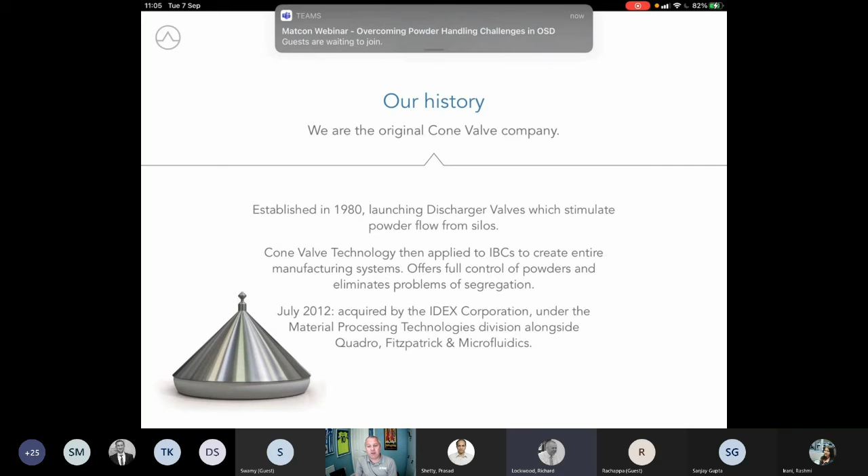Matcon is just over 40 years, so 41 years ago Matcon was founded, making large valves to discharge powders from silos, moved on into IBCs to create systems, and the cone valve, which we'll look at later in terms of what it can offer, allows the full control of powders and eliminates segregation within the powder handling side of things. And in 2012, we were acquired by IDEX Corporation, where we joined Quadro and Fitzpatrick and Microfluidics under the Material Processing Technologies umbrella.

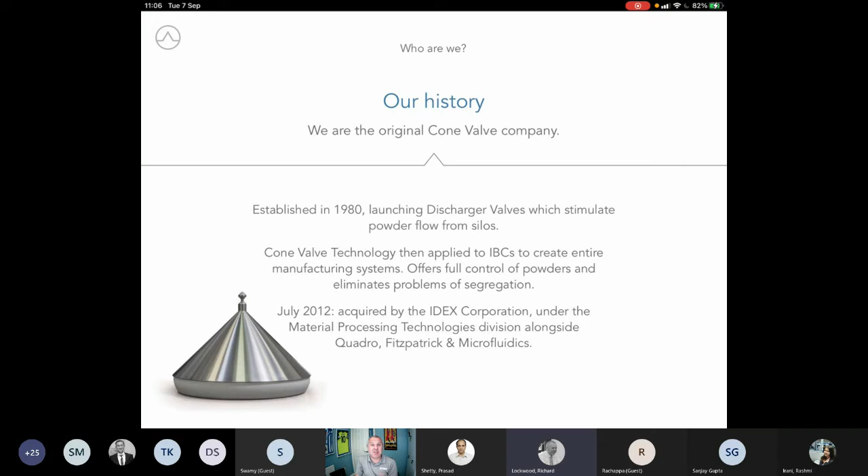So we'll go back now and we'll just have a look at a little bit to begin with at the challenges that the industry faces within the market. We'll come back to this page a little bit later, but we'll focus initially on the challenges. Now, clearly, it's a competitive marketplace that we find ourselves in and that you as pharmaceutical producers find yourself in. We've got to get the highest productivity at the lowest cost, ultimately out of the factory, get the best return on invested capital and get the best productivity we can.

Obviously, we've got issues around powder flow. There's no denying that. Segregation, ensuring the powder is flowing, it's not bridging in hoppers. And those last points, they really impact on the business's ability to be efficient and be productive and make the best money. If we think about things like the issues around segregation and powder flow, wherever you've got an operator having to make a manual intervention with that process, you've got the risk to the operator, you've got the creation of dust, you've got quality by inspection.

You've got to look at these things to make sure that you're maintaining the product, that you've got all of the powder out of the bin, you've got all of the material into the compression machine. Any powder that is left behind inside the process, inside the bin, inside of anything, is something that you can't then put into a compression machine and make tablets with.

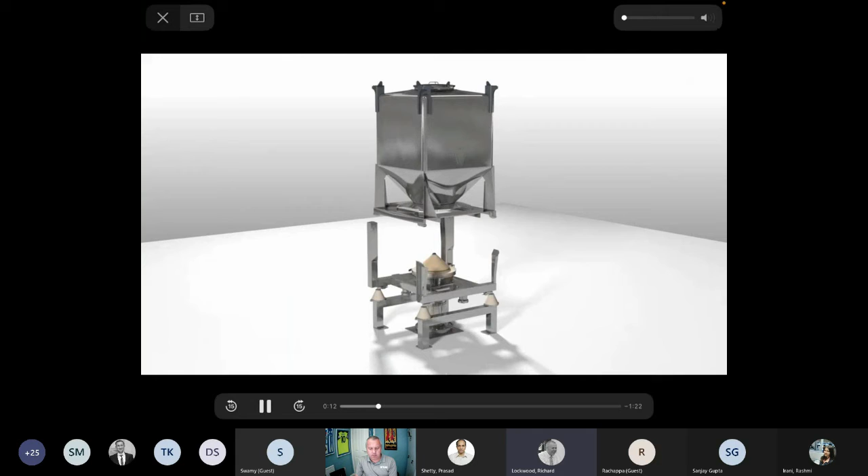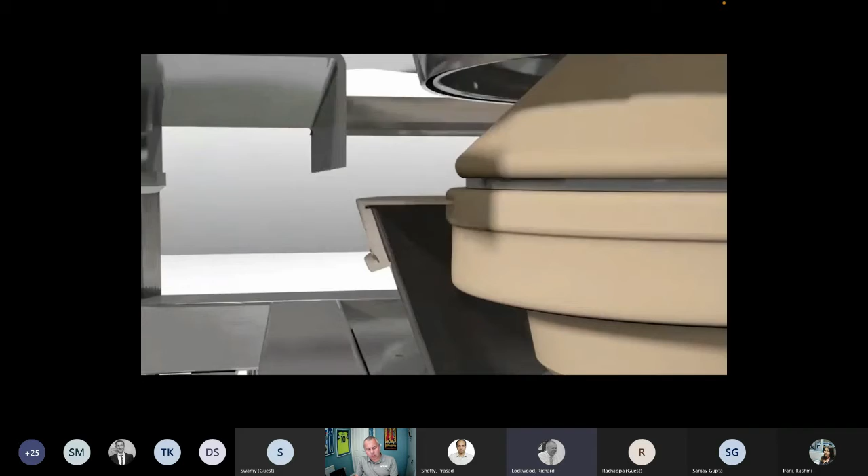I will pause the video as we go through that so I can point out some important details that we have there. So as we said, we have the two pieces there. The IBC is mounted above the discharge station, and we're looking to lower that down now onto that. The cone valve is in the outlet of the IBC and it's loose. And we spoke before about the ability to keep powder inside the process.

What you would have just seen there is the IBC is loaded onto the discharge station. That lip seal was deflected out of the way by the outlet of the IBC. That means that we're creating a dust-tight, powder-tight seal between the powder on the inside of the process, on the inside of the discharge station, and the process environment on the outside.

Again, making sure that we're not contaminating the product from the outside world, but also that any powder, any dust that we're generating is kept inside the process and finds its way actually into the compression machine or into the capsule filler. Because as we said before, if it's on the floor, you can't sell it. If it's on a wall or in the air, you can't sell it.

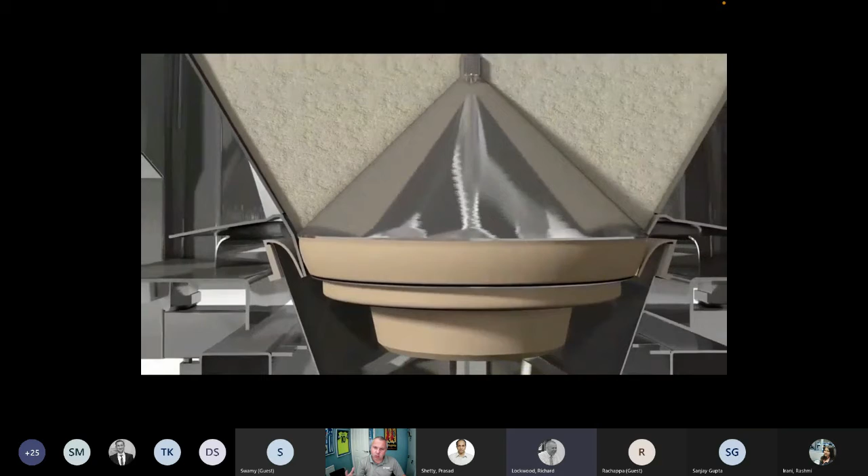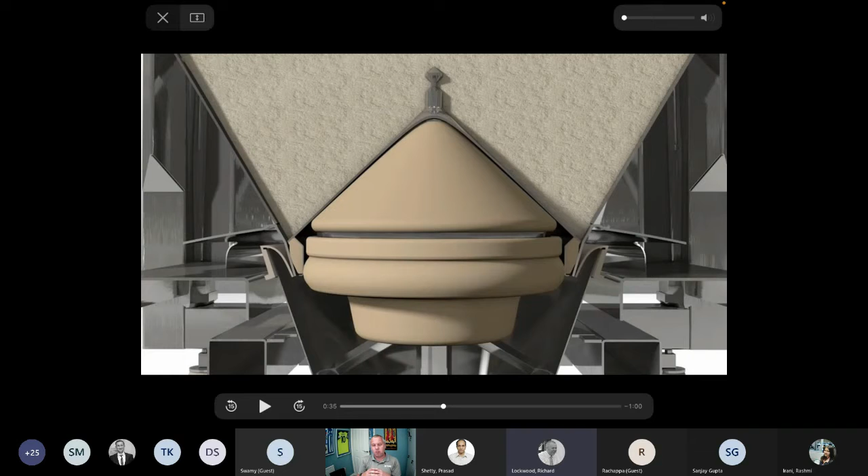So as we move forward, we'll see now a cutaway of the cone valve. The discharge station rises and you'll see an inflation there. What has happened now is that the discharge station probe and the cone valve have become one piece, so that when we actuate the discharge station, we'll lift the cone valve and allow powder to flow. So what we have now, valve is open and we've created an annular gap around which powder will flow out.

So we spoke before about prevention of segregation and protecting the blend that we've got. Ultimately, what we want to do in this scenario is take a blend of granules and make sure they get to the compression machine, that they get to the capsule filling machine in the same state that they left the blender, whether that be a fixed mixer or an IBC blender, which we'll look at later on.

The reason that we help to prevent the segregation is that the powder flows around the outside, around that annulus. There's no core flow. We know with butterfly valves and with other valve systems, we create a core flow. If powder was to flow down the middle of the IBC, we create rolling segregation, and that rolling segregation leads to the larger and the smaller particles becoming separate from one another.

So we're controlling the powder, preventing that core flow, but also we have the ability with a positive shutoff, the powder behind the valve, if we need to close the IBC, the valve closes with the powder. So what we can do in close coupled systems is have a refill to the compression machine hopper. And should you have any challenges with maybe a bit of downtime on the system, because the valve closes with the powder, you can simply remove the bin, carry out any maintenance activities, and then bring that back to the process.

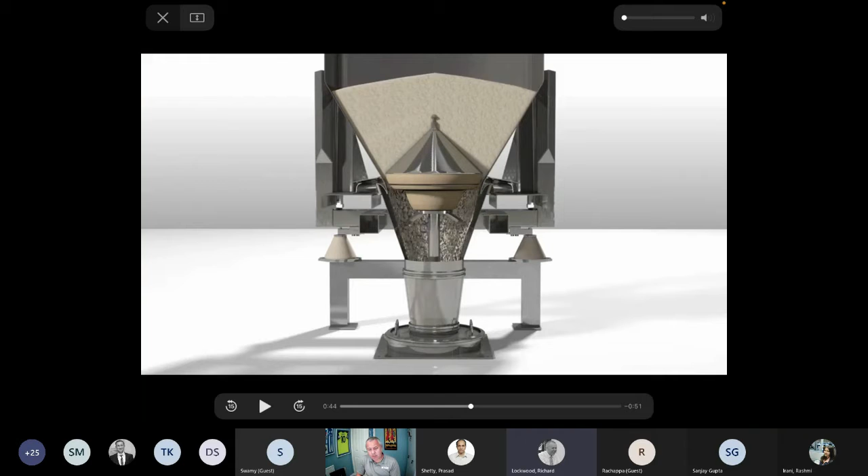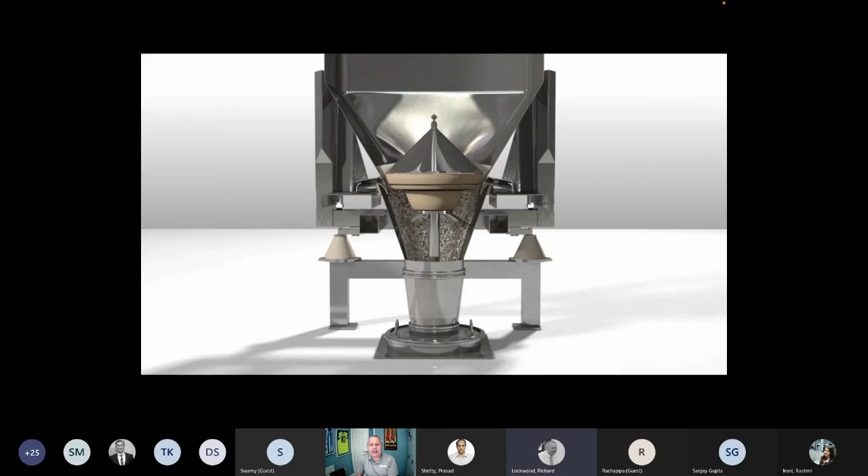So we'll carry on with that. And this valve, while it goes up, we can choose that we can have vibration on that cone. So for a difficult flowing granule, maybe where you've got some lighter, fluffier products, we might need to have a little bit of agitation within the mass of the powder to make it flow. But in other cases, we don't want that vibration in there, because if the powder is free flowing, vibrating it itself will create further segregation.

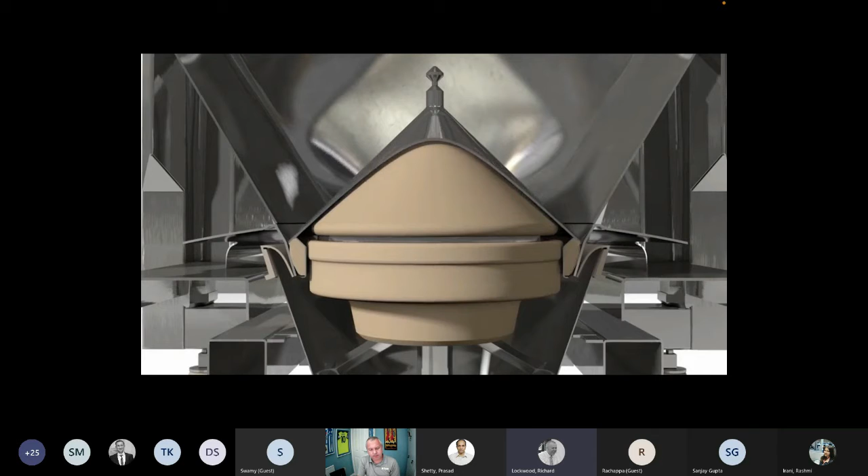So when we undock, it's a repeat of the docking process. The IBC is lifted away, and you'll see there that lip seal snaps back into place to make sure that there's no dust in the environment. The IBC is removed, and depending on how the process is carrying on, would either be replaced with another bin of the same batch of material, or it could be cleaned down, ready for the next batch. So that's how the discharge station works, how the cone valve works.

So we're preventing segregation, we're promoting flow, removing the operator from that process. Within the discharge station, we could add features like weighing, or like vibration. So feeding to the RMG, feeding to the granulator, you can confirm that you've got a completely empty IBC. So you're not producing a granule having left some of the powder material behind in the bin. Or, again, making sure that we've got every last gram of powder, or last tens of grams of powder, out of the bin, and we're compressing that into a product which can then be sold.

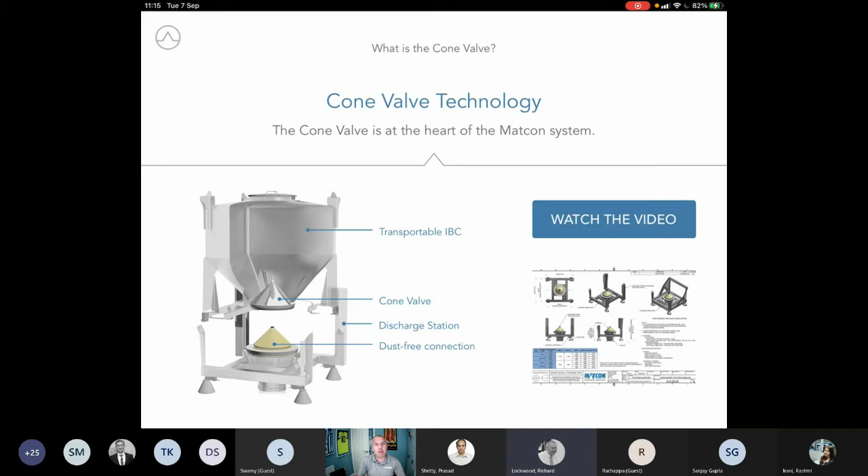So we go back to the slide that we were looking at earlier, and we'll just run through a little bit more on how we can help our customers address those challenges, the needs that we've got. So we spoke about increasing efficiencies, preventing operators' involvement, quality by design versus quality by inspection. That's really what we want to do. So let's look at what we can do in terms of the equipment.

So there's 3 points there, and they're quite interesting when we think about how we can work with this within the pharma market. The IBCs range in size from 200 liters to 3,500 liters. So we can match the batch sizes to the IBC size, so we can reduce the amount of product we're making.

So we're not making to put on the shelf, we're not making to stock, so we're reducing inventory, saving the customer money, saving you guys money, not tying up cash in inventory and work in progress. But also, it may be that as we see the larger generic facilities with some high volume production and some low volume production, one batch size no longer suits the needs. There will be some products that you could make, 3,500, 4,000 liters every batch, 24/7, every day of the week. There are some you may only make 500, 600 liters at a time. So we can now match that.

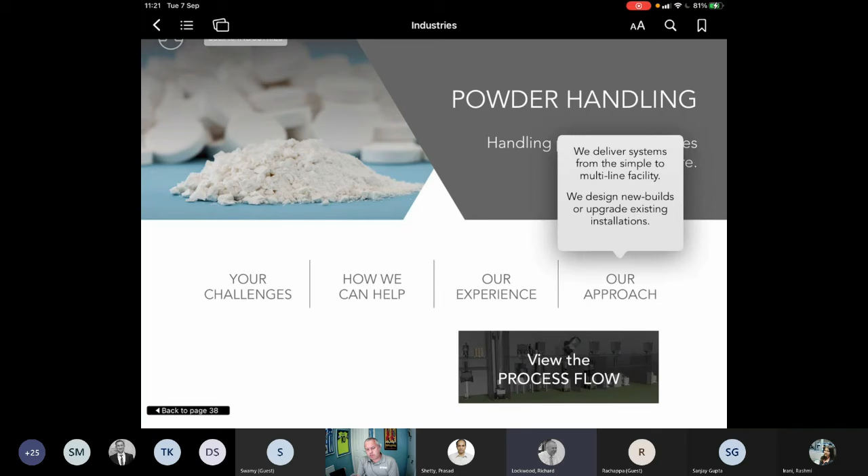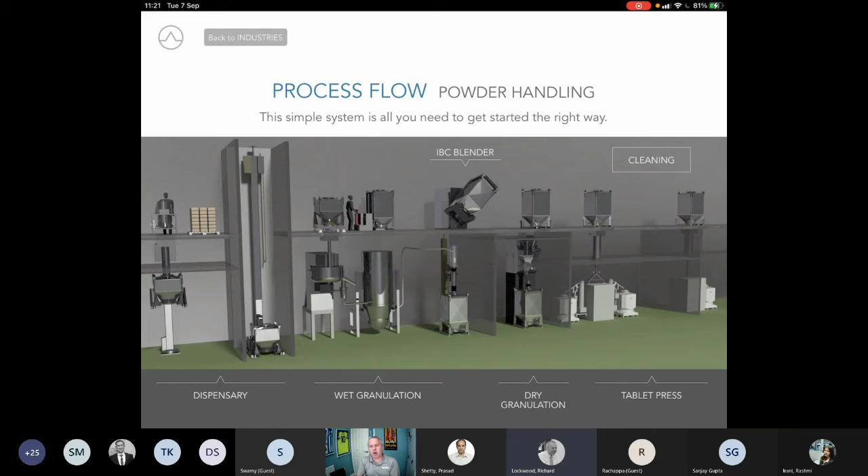So what we have there, we're showing the areas and unit operations that the Matcon system can work with, from dispensing, granulation, blending, feeding, to compression and cleaning. Obviously, that's our idealized factory.

But let's take a look at what you guys probably recognize as a typical production facility. In this case, single floor, small drums being used to move powders around, vacuum transfer between processes.

It has its advantages, don't get me wrong. There's nothing wrong with producing a factory to do this. It's relatively low cost of building. The capital equipment cost is low, and it's safe, it's familiar. It's been used like this. People have been making drugs like this for years. There's no risk around that.

But what you have along this is open transfers where you've got dust potentially coming into the atmosphere. There's an operator risk, there's a GMP risk. It takes forever to clean—you've got to clean that entire process down. It's a crowded production area, you've got lots of drums being moved around, and you've got the challenges of tracing those drums. How many came out of the batch? Where have they gone? What are we doing with them?

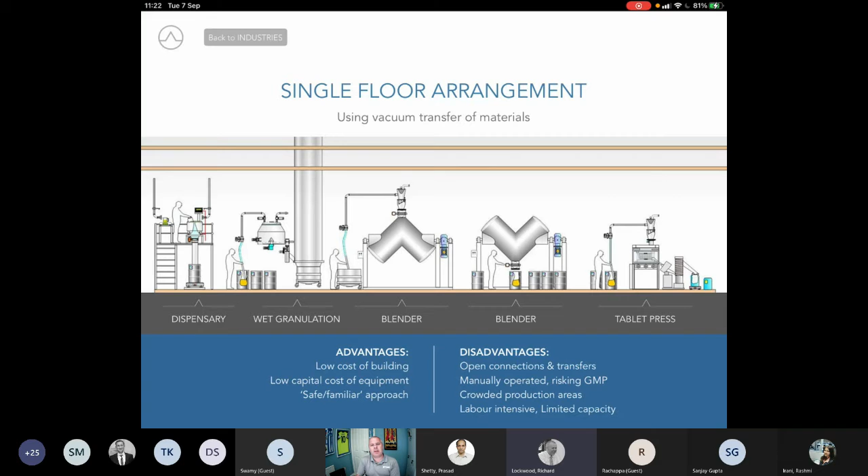So if we look at how we can integrate a bin system to that, and we take a single floor, we're using gravity now rather than a conveying system to get the powder from one step to the other. The same stages still take place—we're dispensing, granulating, blending, and feeding to compression.

But all of these transfer points are now closed. There's no dust in the atmosphere. We've got a safer environment for our operators, and a safer environment from a GMP point of view. More powder is staying inside the IBC, and ultimately more powder means more tablets, which means more revenue for the business at the end of the year.

It's a relatively low cost building—no floors, single floor. We're using gravity to transfer the material, and gravity has always been free, and I would imagine even the best will in the world, no government will ever tax gravity, so we should be okay to continue using that. It increases productivity—we're able to move more powder in a single go.

Where on the previous slide we saw a number of drums waiting by the compression, with a lot of on and off from the compression machine to load and unload or tip drums, in this case we're taking one batch from the blender to the compression machine. What we'd typically do is collect a number of lots from the fluid bed dryer, then blend those to homogenize them and feed those to compression, rather than that single unit transfer we saw with the drums.

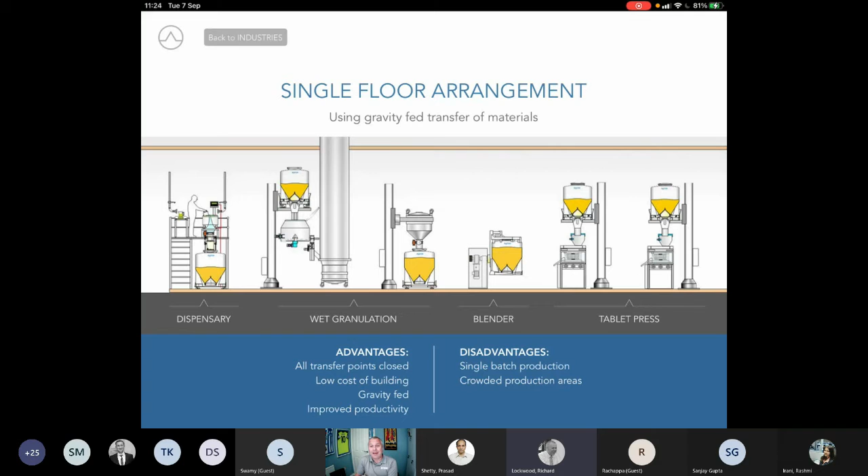Of course, there's a disadvantage to that—I'm not going to suggest this is the best way of dealing with it. It's a single batch. Because you've got everything in the same space, you can't run different materials within that space; you've got to clean down between them. The production now is relatively busy, there's a lot going on, with IBCs being moved around and other bits. But it's a very common design—we've supplied a number of units to India in this way, using pillar lifts to make those transfers and elevations.

An alternative way of doing that is to split the process. So what we've actually got here is that the IBCs move on a separate floor to the process equipment. The operators at the tablet press are kept away from the movement of IBCs. We've got a cleaner, more open area, still using gravity, still got the closed transfer of material. It's a less crowded area, so safer from an operator point of view.

That upper floor, the material handling floor, allows us to put our IBC washing and other bits and pieces up there, so we can keep all of that dedicated. We just have on the ground floor small rooms where we can contain a tablet press, where we've got the ability, from a GMP point of view, to keep the product safe, keep the operators safe, and protect the batch.

Obviously there will be a disadvantage to this. There's a higher capital cost, as you're now building 2 floors. You've got to move things up across those floors, whether that's with elevators or material lifts. Also, the operators can't see what's going on. On the ground floor, the operator at the compression machine doesn't know what's going on at all, he can't physically see it, so there's a requirement for additional automation.

But that's why working with a company who is used to fulfilling contracts in this way, we have the ability to maintain that automation by mimicking, by having a replica between the 2 floors. So whether the operator's upstairs or downstairs, it's clear to see what's happening between those 2 areas. Those are the ways of carrying out that.

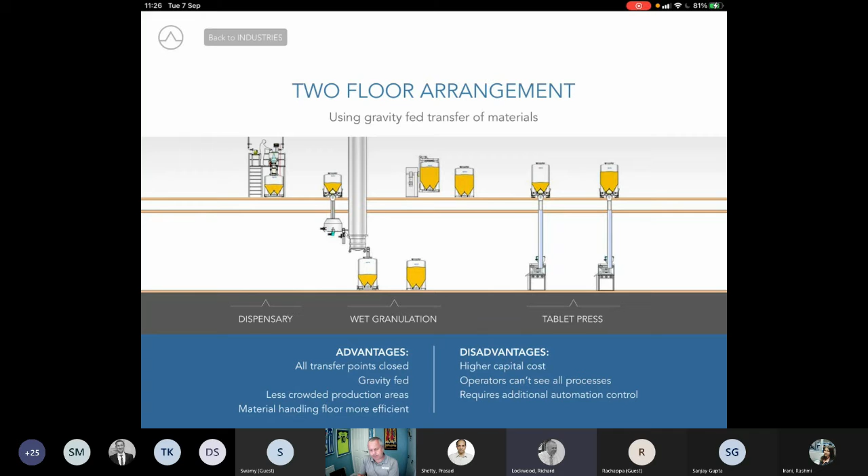We'll take a quick look at the blender. That's where we're going to bring the multiple lots from the fluid bed dryer, bring them together, make a homogeneous mix, and then feed to compression. We'll look at that later - for now we'll just have a quick look at the blending side of things.

The blending system, this is a photograph in our test plant. We're looking to eliminate the downtime. Whereas in a lot of scenarios a blender may be in the same room - you'd use a pillar-mounted blender, then maybe have batch splitting after that - we would advocate not doing that. We would advocate having a blender in a dedicated room.

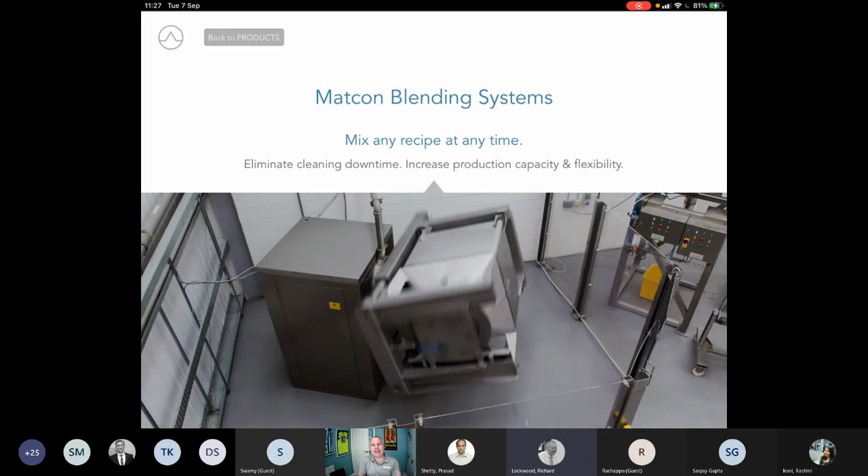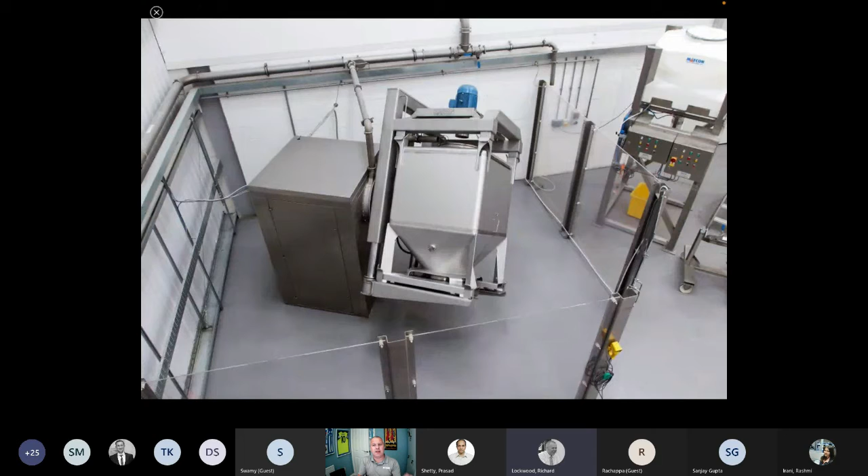The reason being, with the Matcon container blender, there is no contamination, no risk of contamination between batches. We're removing cleaning between batches. So what we want to look to do is have a single blender mounted in a single space where we bring IBCs in - they could be multiple products into that space - and then they go off into the next step where they're then compressed or put into capsules.

By doing that, we have one blender feeding multiple compression machines, whereas having even a pillar-mounted blender in each of the production suites adds cost and adds maintenance. You've got a degree of qualification and training that the operators are required, whereas in this case we can have dedicated personnel who operate blending, and then others who don't.

That blender you see there is a 1500 litre IBC, but the blender that we offer is able to blend IBCs from 200 litres to 3,500 litres. So we're talking a batch size of anywhere up to 1,500, 2,000 kilos of powder going through that process, down to 100 litres or so.

Typically the blender itself can operate anywhere between 80% and around 30% fill volumes. In most cases, our pharmaceutical customers choose not to do that - they generally have a set fill volume, and whether it's a 200 litre IBC at 80% or a 3,000 litre IBC at 80%, that's how they operate.

Our food customers, on the other hand, are slightly more - let's not say brave - but they will operate in a slightly different way. They will go from 25-30% fill volume to 85 and 90% fill volume, but they haven't got to validate the process, they haven't got the FDA looking over their shoulders to make sure they're doing things right. So the idea is one blender feeding multi-compression machines with multiple batches.

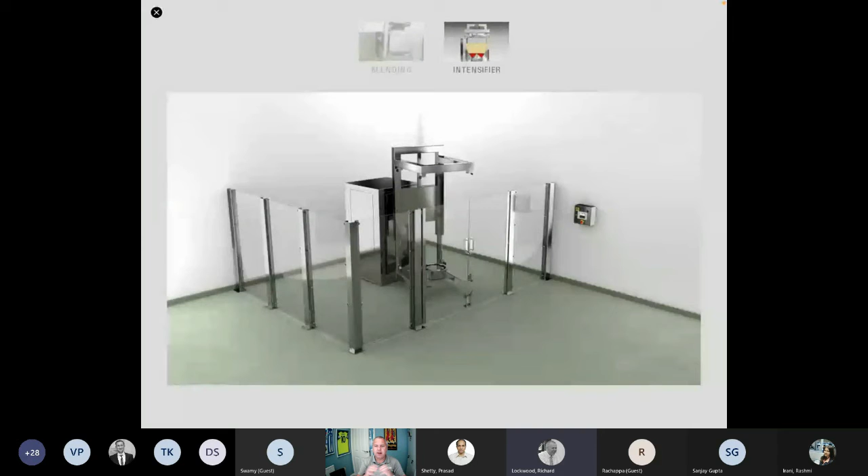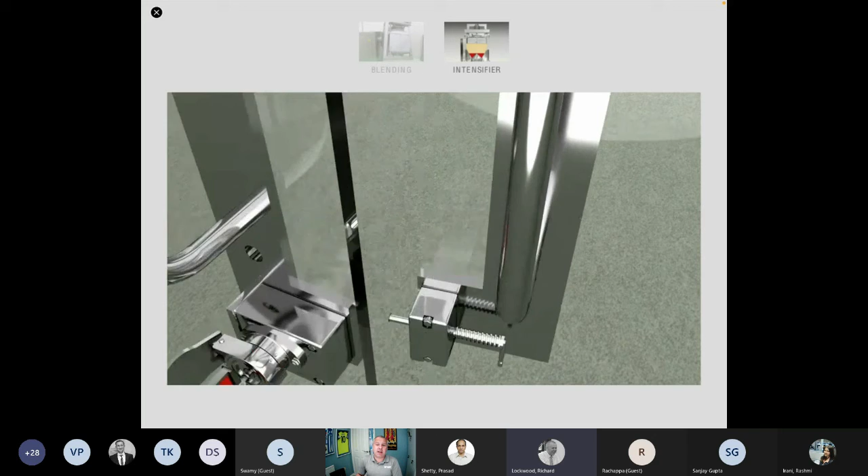The video we're looking at here shows an industrial type application, so we have a safety cage around the blender. Typically in our OSD facilities that will be a dedicated room, but the technology is similar. In order to access the blender, there's a key. That key, once the door is unlocked, remains in the door, and is needed in order to energize the control system. So whilst ever the door is open, whilst ever the key is in the door, the blender can't be operated.

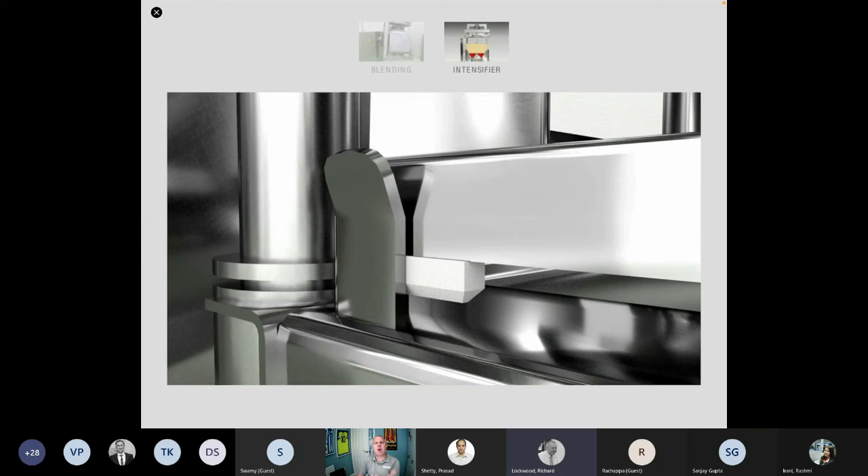We're loading the IBC onto the blender. We'll lower it down, and that piece of the cylinder you saw at the bottom holds onto the cone valve. The cone valve is loose within the IBC, and when we invert it, we don't want it to fall out. Then a hydraulic system closes the cage, and we simply rotate the IBC around the center of rotation.

So the door is closed, and that key now is released for the operator to use in the control panel.

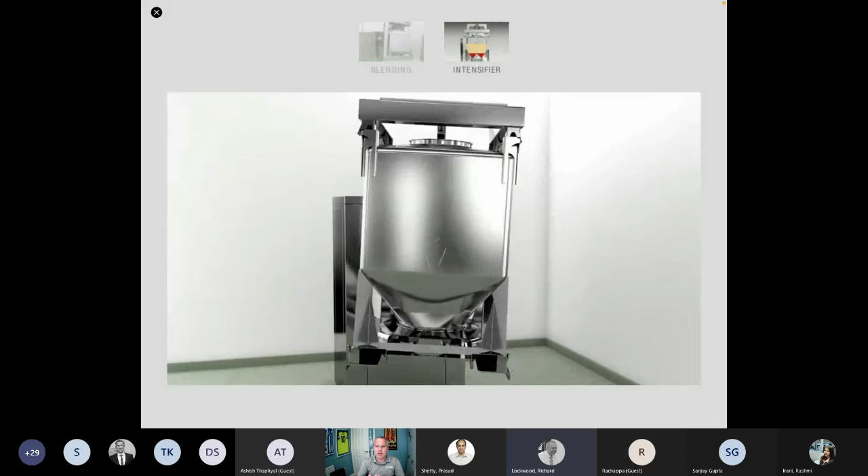There's a number of interlocks on that system, one to make sure the bin is there, one to make sure the lid is there, one to make sure that the cone is in place. So again, we're making sure that no mistakes can happen. No need to check. The automation system will do that for us.

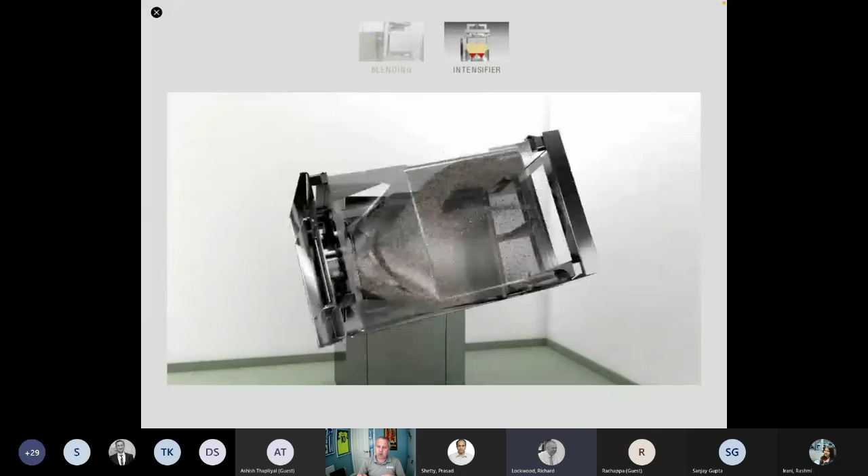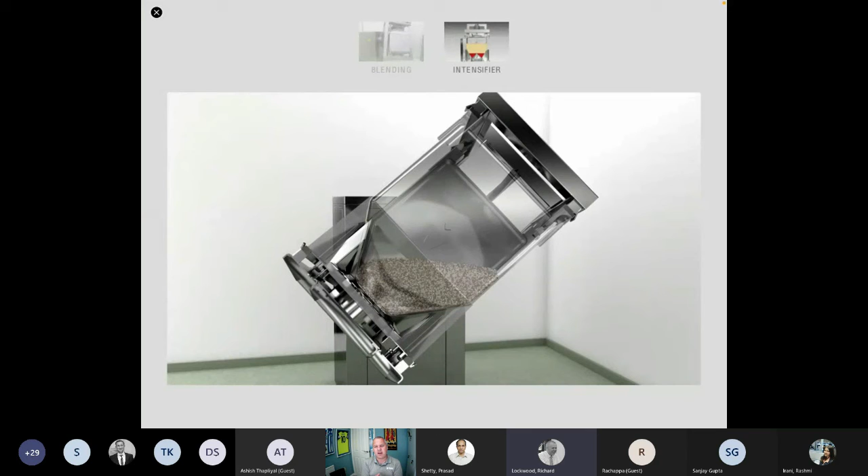The IBC itself is rotated 20 degrees against the blender itself, so whilst we're creating end over end blending, we're also creating a degree of side to side motion within that. And also the cone valve in the outlets of the IBC almost bifurcates the powder every time the powder slides down the IBC, increasing the amount of shear that we're generating. Contour blenders, container blenders, rely on that shear in order to create that.

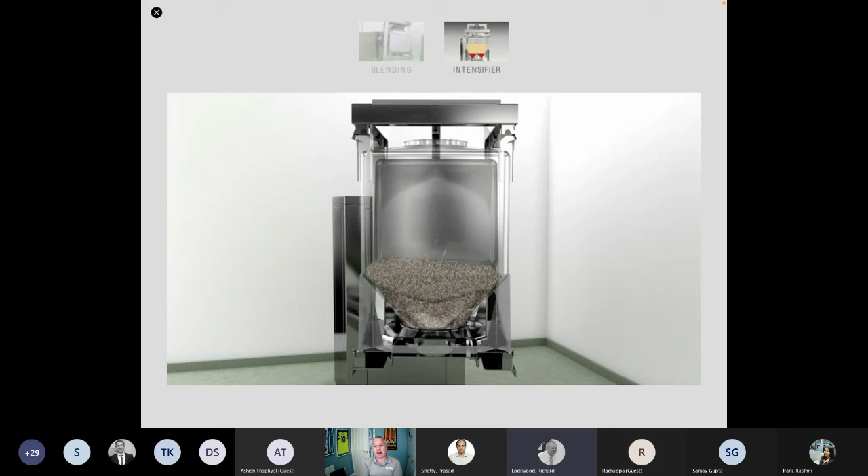So we had an added feature with the cone valve and that offset angle to make sure that we have the correct blend.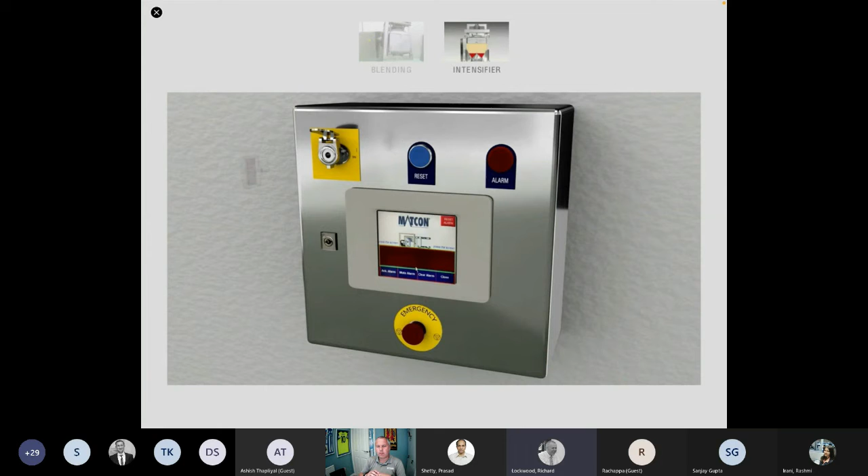And then once we've finished, we take that out. The blender is now inactive. We've isolated that, the control panel is isolated, and we can remove the IBC.

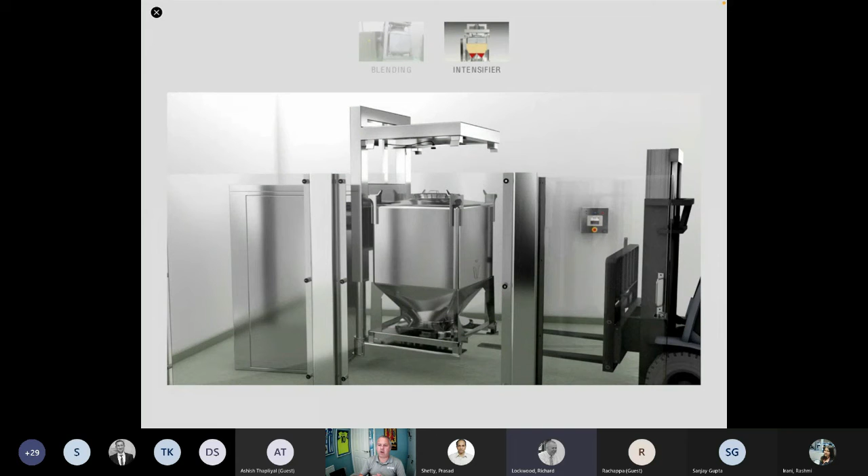Again, we're showing a forklift truck removing that. I don't think I've ever seen a pharmaceutical plant in the world where we're using such a device to move things around. It clearly wouldn't be hygienic for you guys, but this just shows an illustration of what we're doing. So literally, the moment that IBC is taken out, we can go with the next batch.

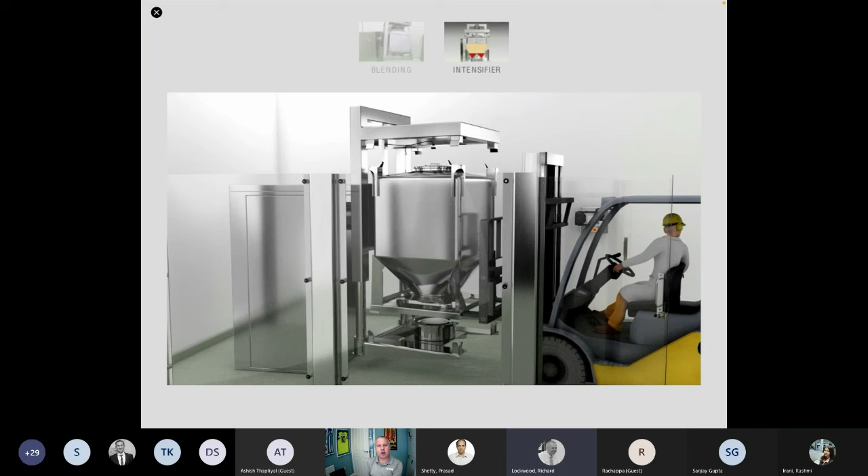Now that IBC there is 1,500 litres. The next bin into the process could be a 500 litre IBC, it could be a 3,000 litre IBC. We're introducing a greater deal of flexibility into the process, with that single blender feeding to multiple production lines. That's the compression lines.

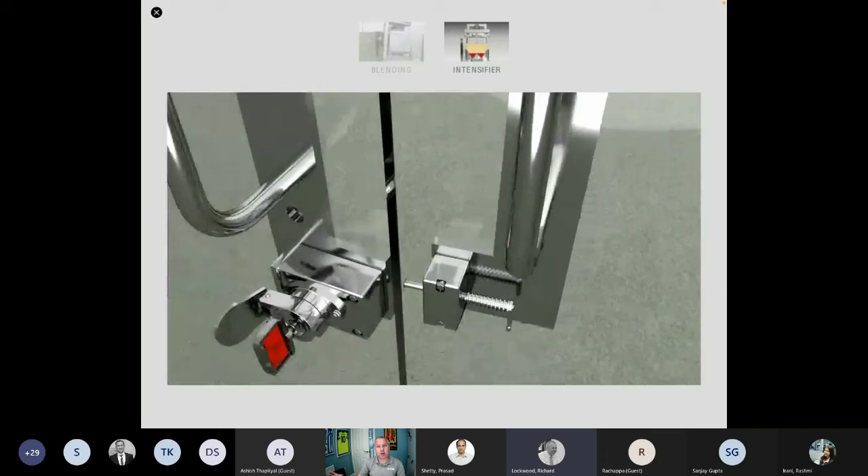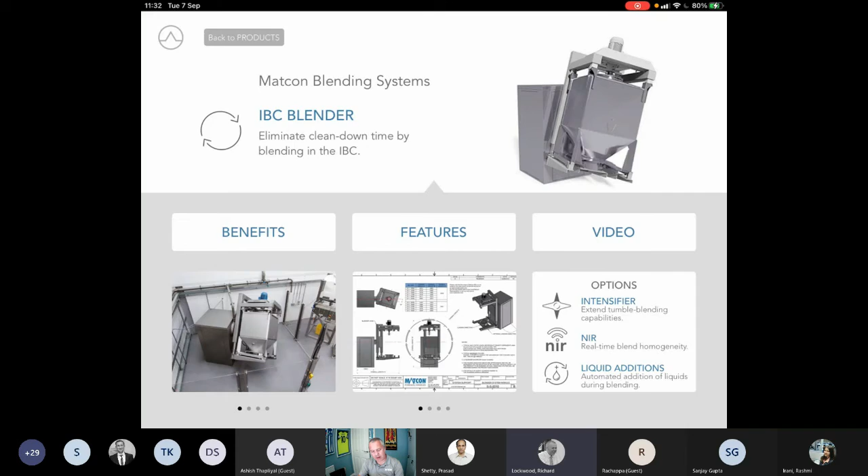So that's the blender. We said we then look at feeding to compression, so we'll go back through to that part there. And what we have is feeding to the tablet press.

So this is obviously the most important part of the process, because this is where we take what is a homogeneous mix of powder. The point is that what we're doing now is we're adding value to this process. Until it's in the tablet, until it's in the capsule, it's not a saleable product.

So what we're doing here is we're using the discharge station, we're using the cone valve to protect the mix, removing segregation. There's no core flow. We've got mass flow in the IBC, so the product comes down together, no funnel effect, no rolling segregation from that.

With a consistent flow of powder, we can lift up to 2,000 kilos of material with that cone valve. So we're able to consistently open and discharge powder, even on the larger batches where we've had that potential compression of material in the outlet.

No need to hammer and bang the bins or take rods in there and do that. It's a fully automatic operation. You put the IBC on, a little sensor confirms an IBC is in place. There's a handshake electronically to the compression machine, and the process starts.

In actual fact, in most cases, the compression machine, the capsule filling machine, is controlling the process. It's taking over for us. We just tell the system we're ready, and when the compression machine is up to speed and ready, it will give us a signal. We will open the valve, depending how the system's set.

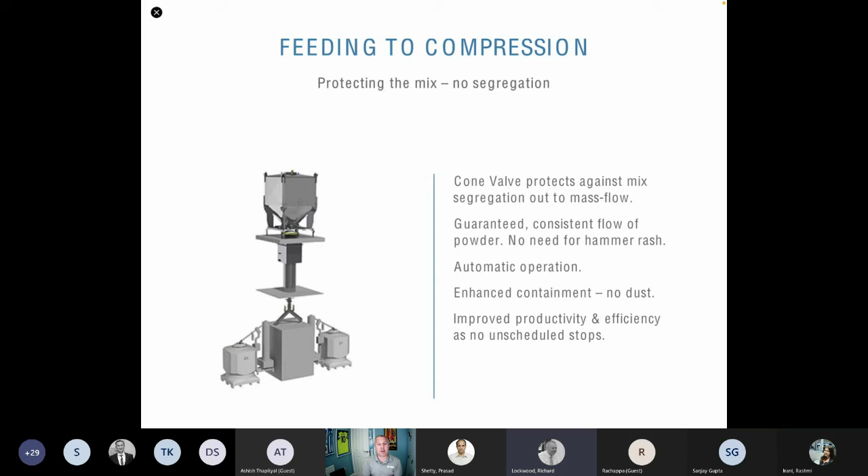So now we've taken the powder, we've dispensed it, we've blended it, it's now compressed. You see at the bottom of that picture those two white square blocks - they're tablet IBCs. So what we look at now is what we do with the tablets once they're compressed, because we can also improve the efficiencies around the tablet handling side of things. Let's go and have a look at what we're doing with that.

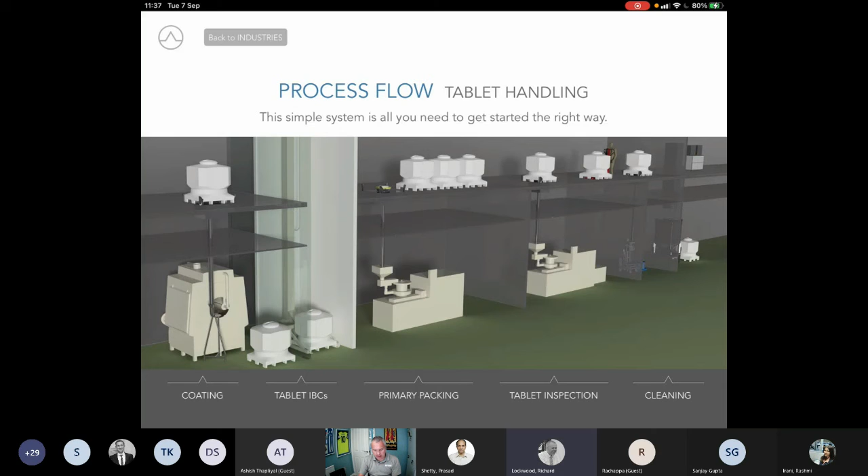What we're seeing there is the tablet IBCs, those white boxes, across all of those process areas: coating, packing, inspection, cleaning. We're collecting the tablets from the compression machine, from the capsule filling machine, in these plastic IBCs. Plastic, so they don't make a mark on any uncoated tablets - it's softer. We put a spiral inside them so that we're not dropping the tablets from the outlet, we're gently lowering them down into the process. So what we can look at is where we're deploying these in various parts of the system.

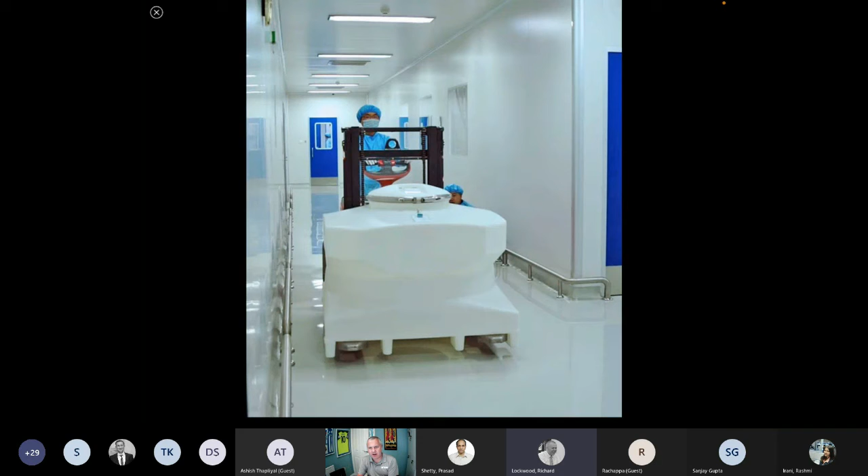That's the tablet IBC, 500 liters up to 1500 liters in volume. Again, they're moved around the facility with a walk-behind truck. And we can see there the spiral that we spoke about in the inlet to slow down the flow of tablets into the system.

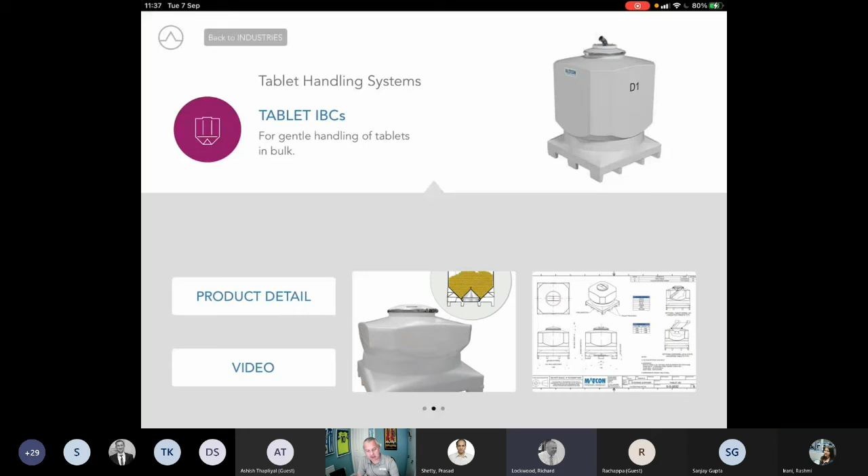Now, compare that to traditionally moving tablets through a facility with drums - 25 kilo drums. If we've got 250 kilos of tablets coming off that line, you've got 10 of those drums. So if we can replace that with a 250 kilo batch IBC of tablets, we're saving the process that we'd normally go through tenfold. For every label you would write, every bag you would write, every note you would write to identify that batch, rather than doing it 10 times with a drum and bags, you either don't do it at all with an IBC system because we're relying on maybe barcodes or other electronic tags, or you only have to do it on one occasion.

So we're reducing the risk of error, we're improving batch traceability, and actually making the place a bit neater, a bit smarter place to work. So that's collecting from compression.

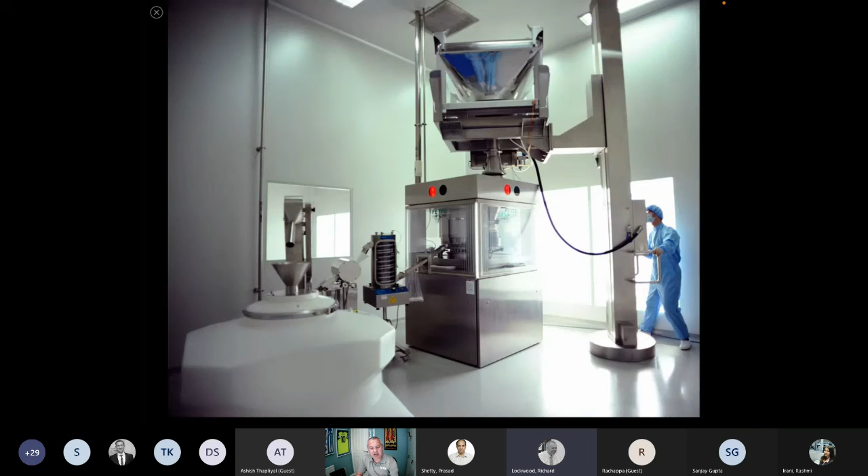Then we can go feeding to coating. So in this case, we're showing an image there. This is using an elevator, a pillar lift to lift the IBC up. We have a mobile chute, which is designed to distribute the tablets into the coating pan. So again, what we're doing, we're moving an entire coating batch within reason in a single IBC, and we're filling it far quicker, far more efficient.

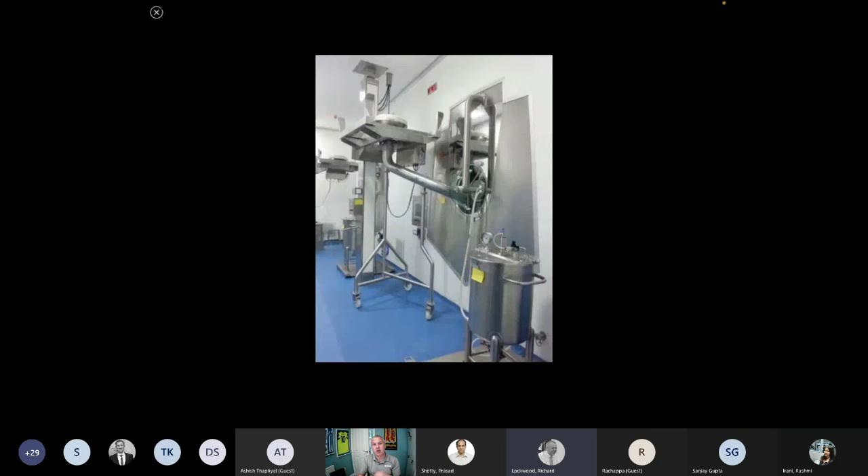So actually, rather than that process again of 10 drums, opening the bags, removing the seals, removing the liners, lifting the drum, tipping it 10 times, we can do that in a single process with a 250 kilo IBC of tablets.

And again, when we're feeding to the packing machine, taking that batch of tablets and just in one go, loading with a pillar lift and leaving it there to go through. No need to have an operator standing on steps, tipping drums, or having a tablet elevator. All of those parts of the system add to complexity, add to operator involvement, and the risk of mistakes being made.

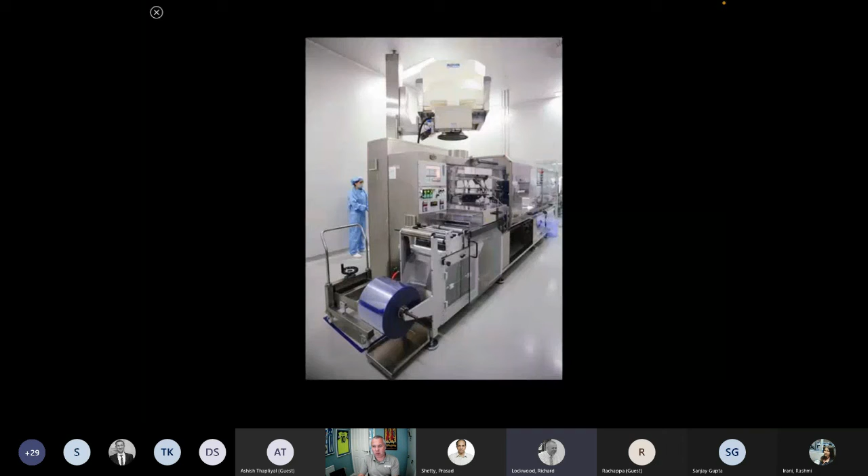So again, quality by design, make the automation work for us, have the handshake so we don't have an operator starting to feed tablets before the packing machine's ready, or tipping tablets before the coater's ready. It's all done with automation for us.

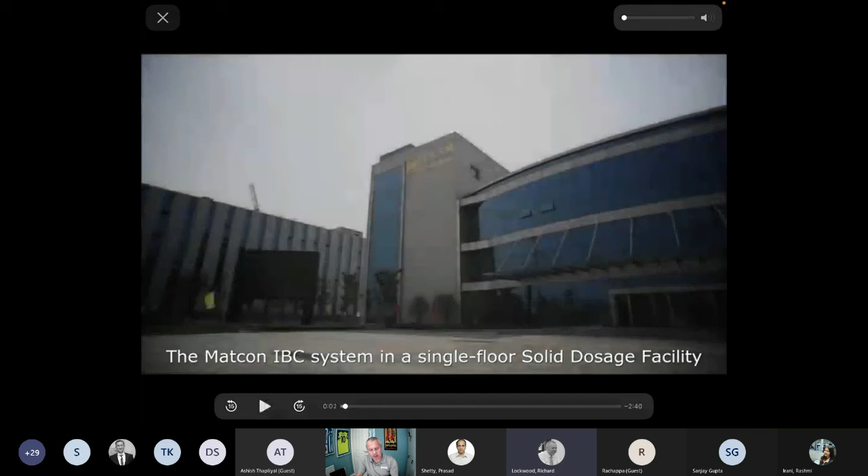So just finally, what we'll do, we'll have a look at a video showing a system in process. I was going to skip through to the last minute of the video where we're focusing on the tablets handling, because we've seen the discharge station operation, we've seen the cone valve in operation, we've shown the blender. So we'll just skip through about a minute and a half in the video. This is actually a factory, a client of ours in China who put a Matcon system in, single floor facility. So let's just run on through to about 1:30.

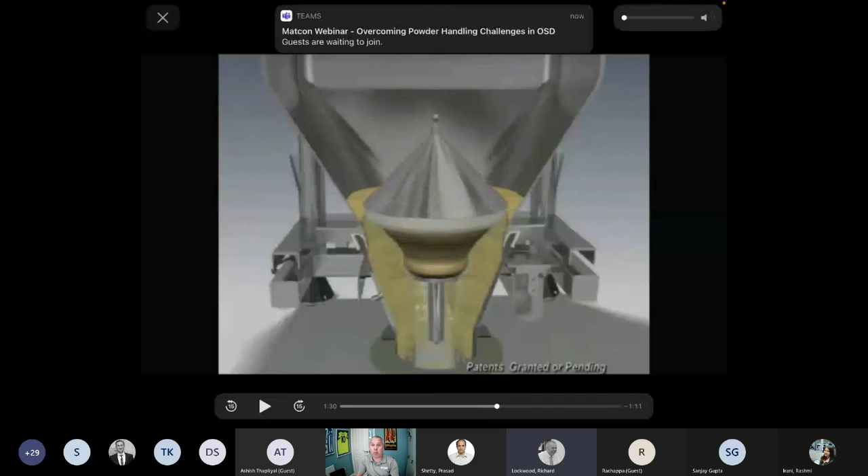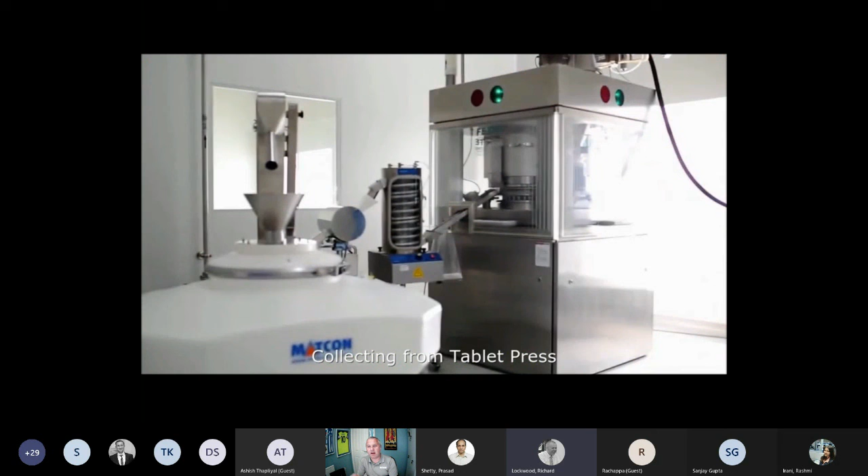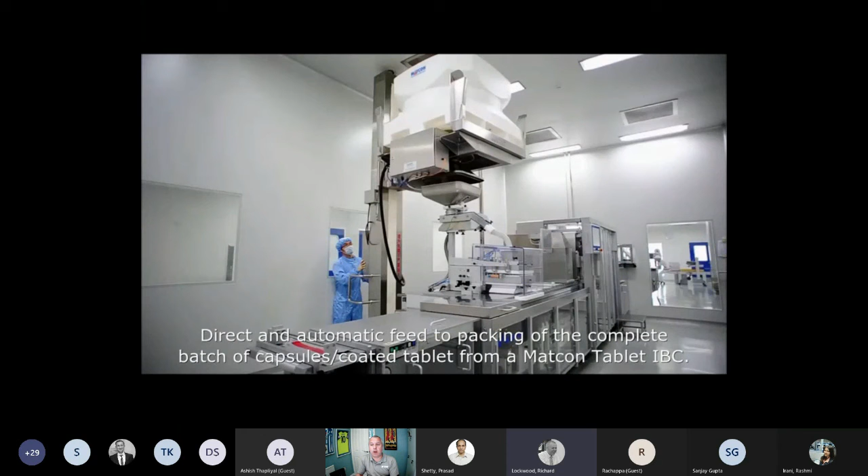So what we'll now see is the tablet IBCs being deployed within the factory. So you might recognize that's the video of the photo we looked at before. And if we've got larger coaters on site, obviously there's no reason why we can't collect multiple lots within IBCs and then deliver those to a coater where we can then coat a larger batch.

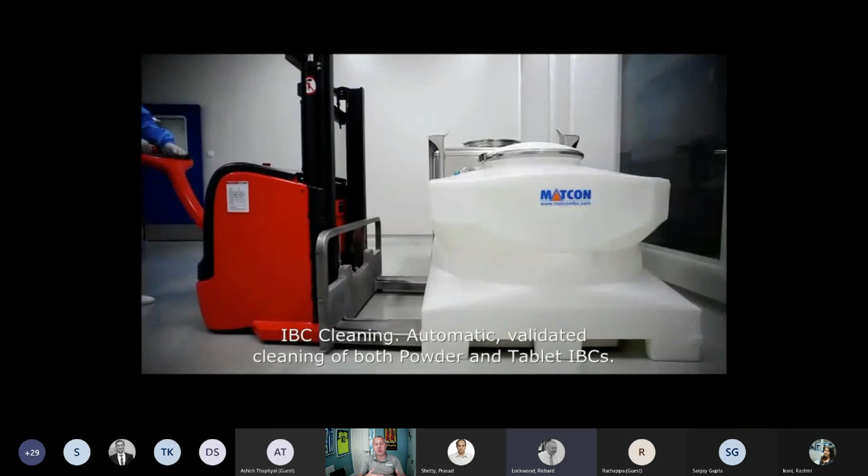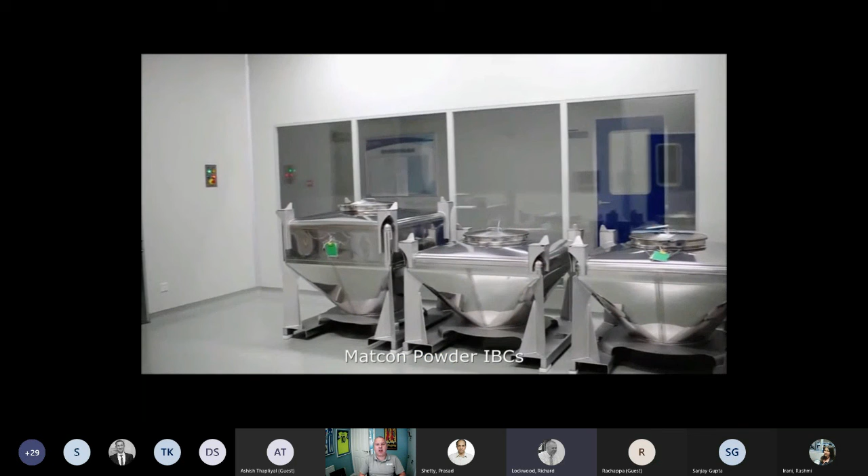And again, because we've got that larger volume, a larger buffer of tablets or capsules available to us to use, you can start to run those machines faster and get those efficiencies. There's less risk around, is that hopper of the blister packing machine going to run out of tablets, so we need to slow it down because it takes 3 minutes for a guy to climb a ladder and refill that hopper. We can start to expand the capability and the capacities of the process equipment, improving the efficiencies, getting more tablets, getting more capsules through the factory.